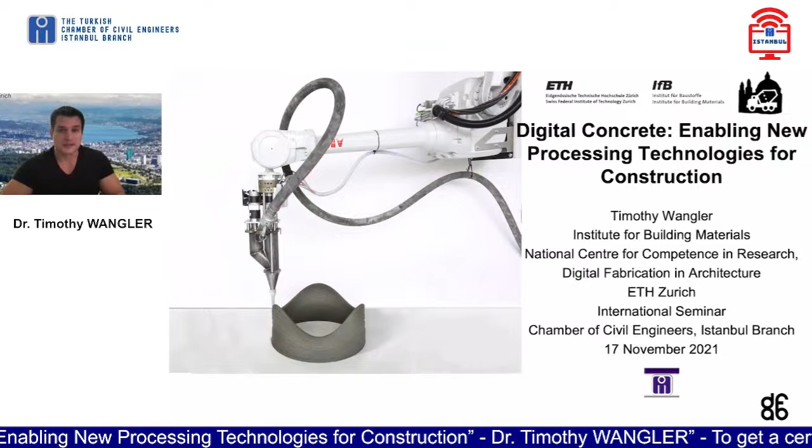Thank you very much, and thank you for the introduction. It's really an honor, and I thank you for this invitation to give this lecture and this seminar. It's really wonderful that we can do this online via Zoom, as we're all used to by now, although I much prefer to do these types of things in person. I still have fond memories of speaking in Bursa two years ago, especially of the kebab Iskander. But enough of that—now it's time to discuss digital concrete and the real topic of my seminar.

I won't go into much detail because of the nice introduction about where I'm coming from, but I'm coming from the Chair of Physical Chemistry of Building Materials at ETH Zurich. It's headed by Professor Robert Flatt, who's a world expert, of course, in chemical admixtures, especially superplasticizers. We have a rather large team, and of course, as I mentioned, a strong competence in chemical admixtures, which is in fact one of the most important aspects of research in digital fabrication with concrete.

The team, with respect, actually about half of the research group's focus is on digital fabrication with concrete, with some faces that are involved or recently involved, seen here in this slide. So it's quite a wonderful topic for us for the past few years, with a lot of things going on, especially thanks to the National Center of Competence in Research, which started in 2014. It's a 12-year funded program that we are one of the participants of.

It's the largest funding mechanism from the Swiss National Science Foundation. It was an initiative to foster architecture, construction and digital technologies, and to bring these together with many different researchers, all brought together in an interdisciplinary center.

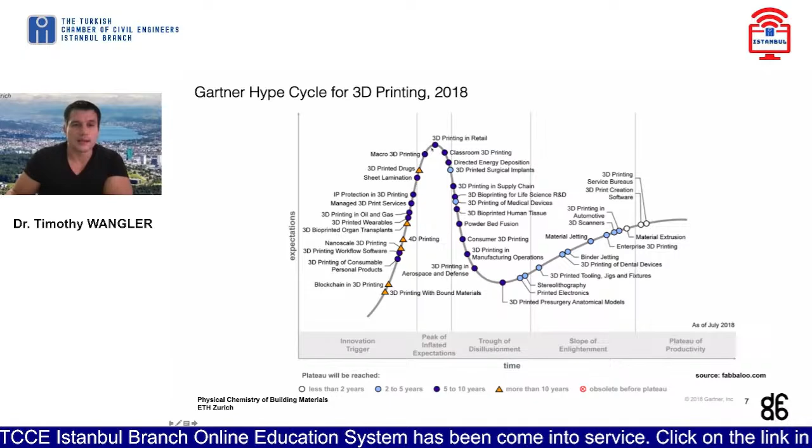So I often like to include this slide, which is something called the Gartner hype cycle. The Gartner hype cycle is a kind of descriptive curve of how technology evolves. A new technology first has some trigger, it explodes onto the scene, and everyone believes it will save the world. Everyone believes this is the newest and greatest technology before it reaches this peak of expectations, which are just too high, and everyone realizes that this new technology won't save the world, and it comes crashing back to Earth in this so-called trough of disillusionment before entering what's called the slope of enlightenment.

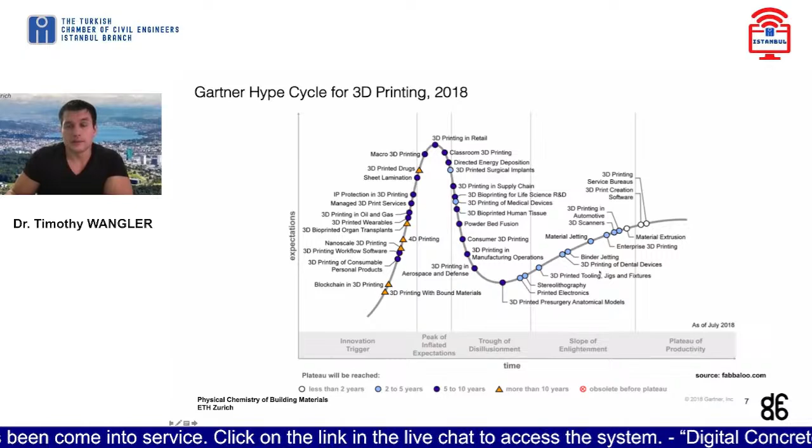This hype cycle has been generated for many different types of technologies, including 3D printing. I believe that our little section of 3D printing with concrete can be included here as well, in the top here in macro 3D printing. But keep in mind, this is from 2018. I believe we're starting to fall down somewhere in this region by now, because while there's a lot of hype for it, there's currently a lack of very big market penetration. This will probably take some time before it gets to that point.

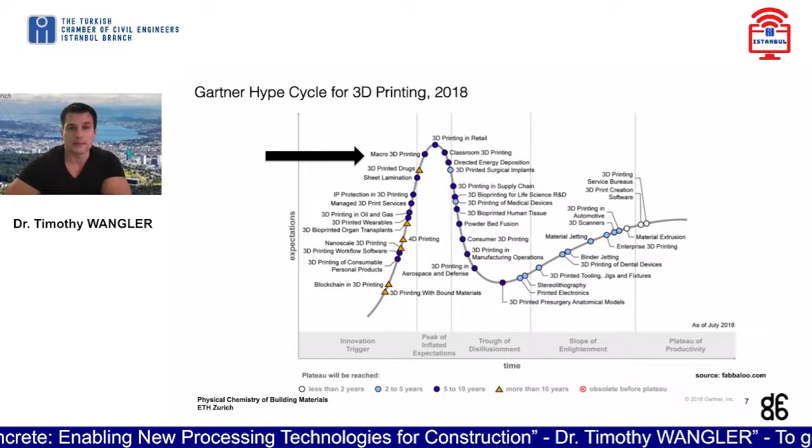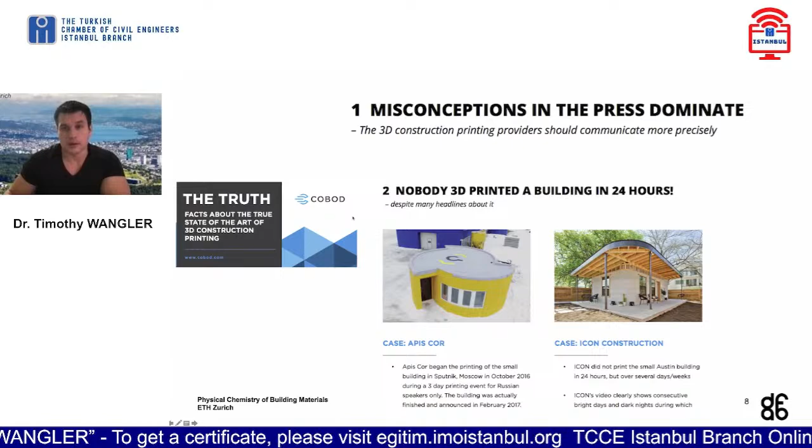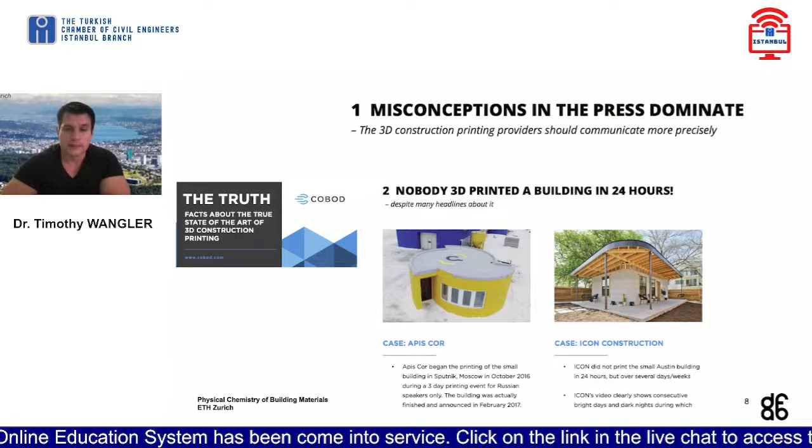Not to mention that a building is a lot more than just the concrete vertical walls. Many different aspects go into a building besides just the walls. But even the walls have not been 3D printed in 24 hours. So many challenges still remain, which we'll discuss.

So why all this hype? It's worth asking, what problem are we trying to solve with this technology? What is it really good for? What we at ETH Zurich believe is that its main promise is in increasing sustainability, while many are attracted to its increase in productivity. So we think it has the chance to reduce the environmental footprint of concrete, and there's also the idea that it can increase the speed of construction.

So let's focus on the sustainability case. Well, what does 3D printing bring you? It brings you shape freedom.

Essentially, it gives you what you could say is complexity at a lower cost. So you can produce bespoke or unique elements without paying for very expensive processes to create them.

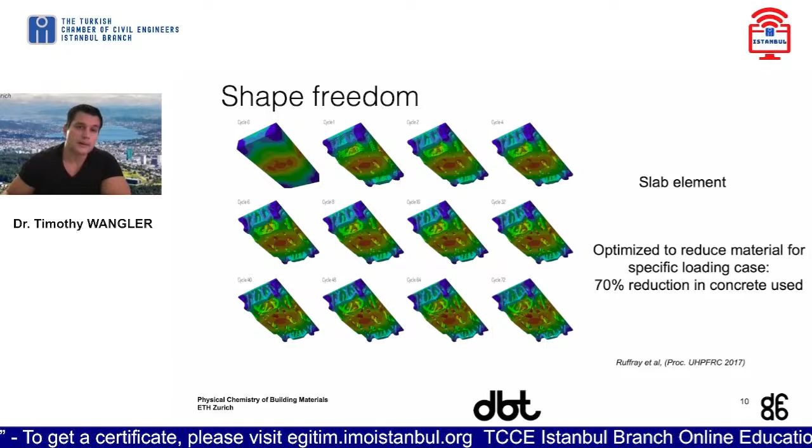To give an example, this is a slab element using a topological optimization algorithm for a specific loading case. Material was removed so it could still support the load with up to 70% reduction in concrete, the idea being that you're putting material only where it's needed. And if you're putting material only where it's needed to create this complex shape, how are you going to create it?

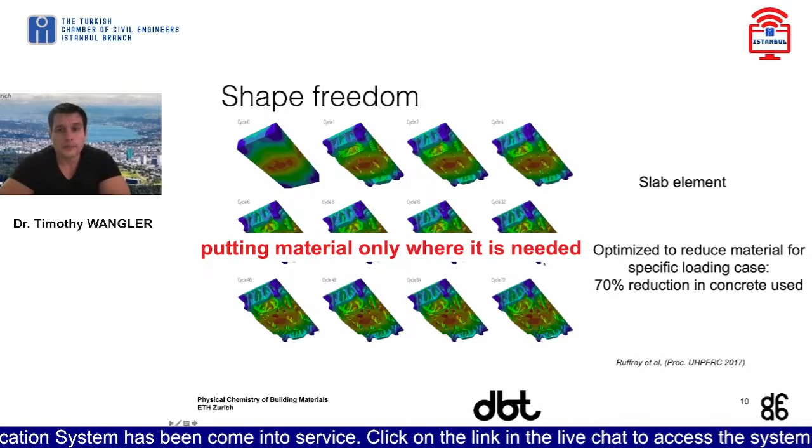It turns out that to create this complex shape, you need a method which can create these complex shapes at a lower cost, because until now, architecture really is limited more by the economics of construction rather than by physics. It's limited because of the construction of formwork, and formwork forms up to 50 or more than half of the cost of many standard constructions.

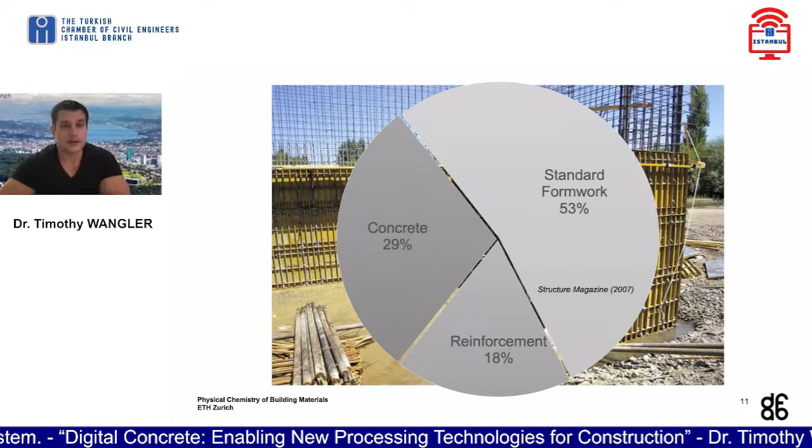This forms really the big share of the costs in construction with concrete, formwork labor especially.

So the moment you become non-standard, your costs increase dramatically.

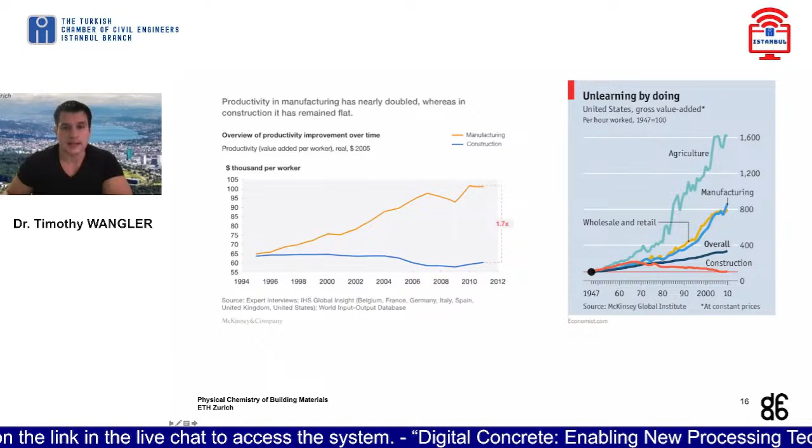So why is there this huge gap between the other sectors? As you can see in this plot, agriculture has really exploded in productivity compared to construction, which is just lagging overall. And here we see manufacturing again.

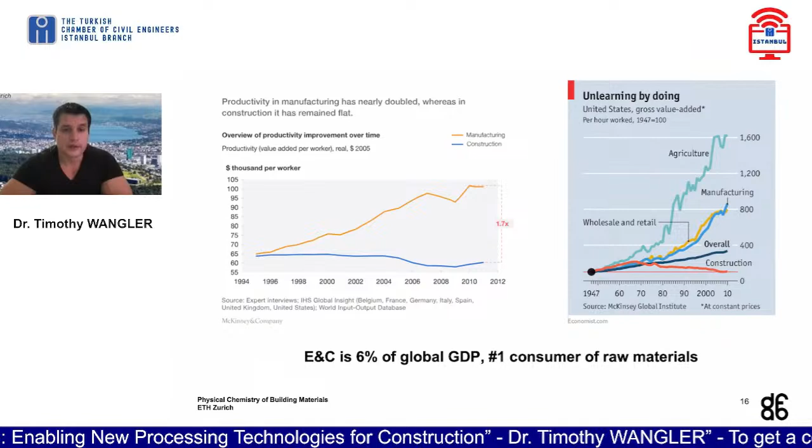This is a very big issue because engineering and construction, or the architecture, engineering and construction sector, is 6% of global GDP, and it is the number one consumer of all raw materials in the world. So greater productivity would be a wonderful thing for the construction sector to realize.

The major cities of the world are all suffering from a labor skills shortage. Many of these construction jobs are considered undesirable in these areas, too dangerous, and as a result it's very difficult to find workers, even for many standard jobs, as maybe you've seen in the news in the United States. It's very difficult to staff.

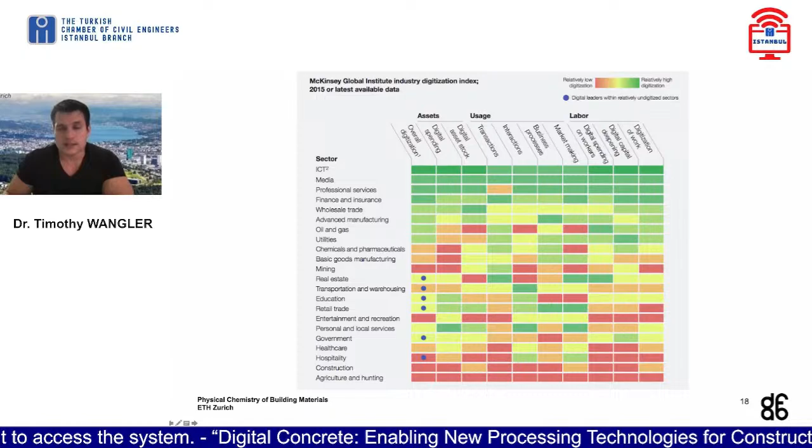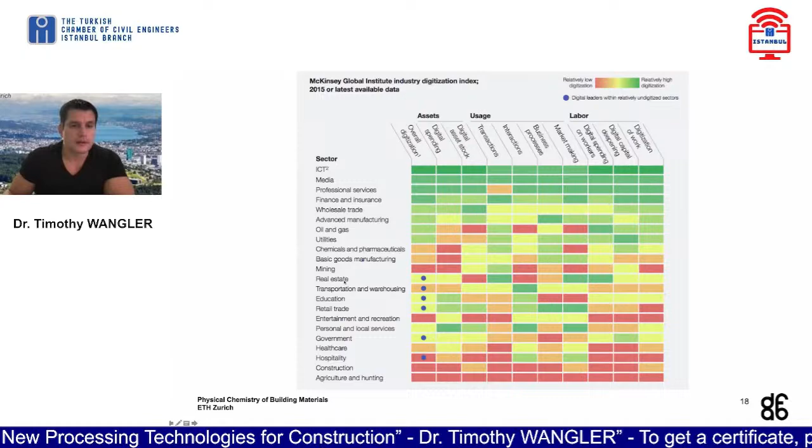Another major problem affecting the construction sector, which is probably related to its very low amount of productivity, has to do with its level of digitalization. This is from the McKinsey Global Institute, where they created a digitization index showing the level of digitization in different sectors of the economy. As you can imagine, things like media are very well digitized, and even manufacturing quite well digitized. But down here at the bottom is construction, just above agriculture and hunting. So construction really suffers from a digitization gap, you could say.

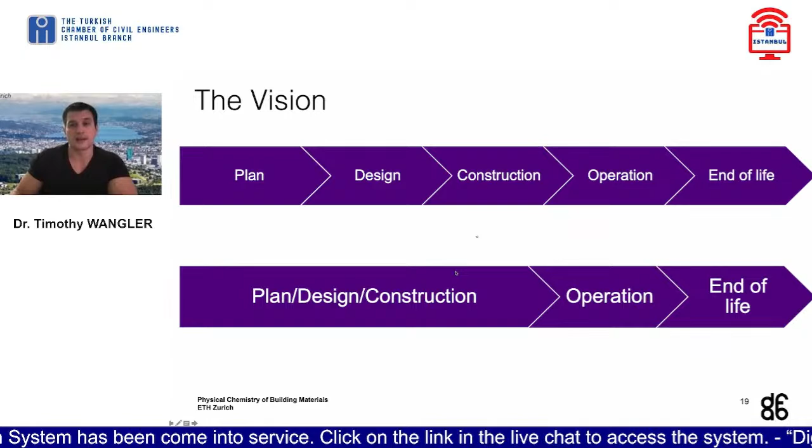So the vision to address all this has to do with the chain of events that occur in a construction's lifetime. First comes the planning, then the design, then the construction of whatever your building is, then the building or structure has to be in operation until it reaches its end of life. The idea behind the use of digital fabrication technologies is to merge these first three steps—planning, design, and construction—to make this much more efficient. Once these are much more efficient, this will help reduce costs and increase productivity.

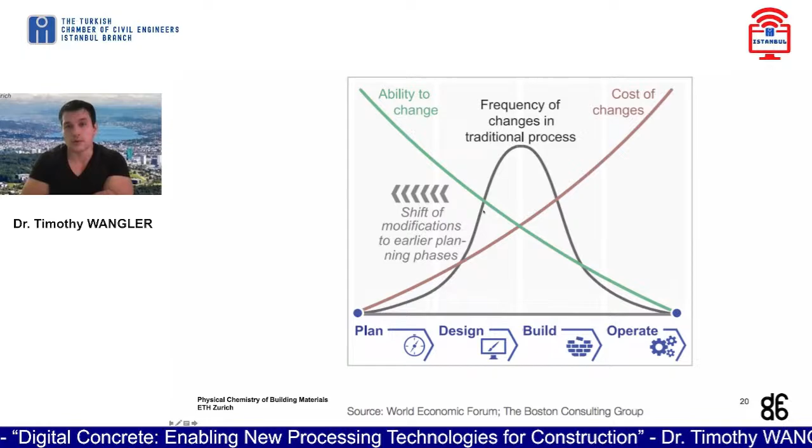The more you shift your modifications to the planning and design stage, when things are just virtual, either on paper or in digital form, then your costs decrease significantly.

One of the questions I want to answer at the end is whether these two reasons for doing this technology are compatible. We'll come back to that at the end of the seminar.

Now I want to discuss the methods that we've developed at ETH Zurich. We've developed quite a lot of methods, but many others have developed them as well.

At ETH Zurich, I mentioned earlier the demonstration called the DFAB house. This house is located in Dübendorf at the EMPA campus, at a building called Nest, a series of slabs where you can test different construction technologies in a modular fashion. We tested the construction of this DFAB house, which contains different elements, or innovation items, related to digital fabrication technology.

What you saw on top were robotically fabricated timber units with a translucent facade containing special aerogel insulation, and then a so-called smart slab made from 3D printed formworks. The facade, a clear facade supported by different mullions or columns, was produced by our Smart Dynamic Casting technology.

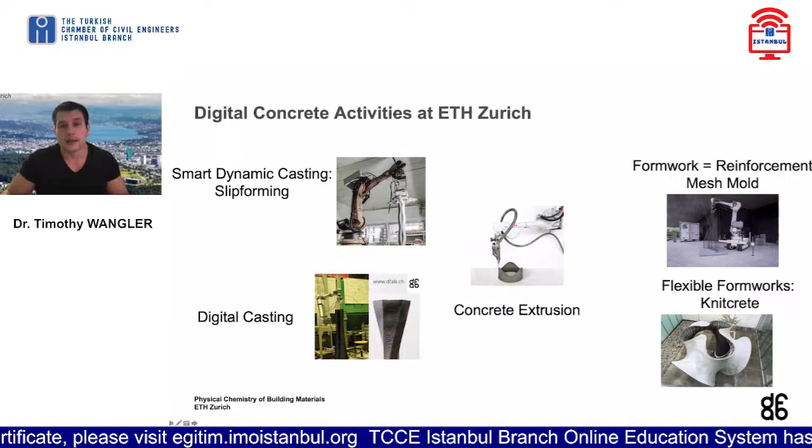So these are the different technologies developed at ETH Zurich. I mentioned Smart Dynamic Casting, which is a slip forming technology. We have digital casting, concrete extrusion or 3D printing, which everyone is familiar with. And then mesh mold and knitcrete, which I'll discuss as well.

First, I'd like to talk about the mesh mold technology. The idea is to robotically produce a mesh which acts both as formwork and reinforcement. It's essentially the construction of a functional formwork, a very promising type of technology.

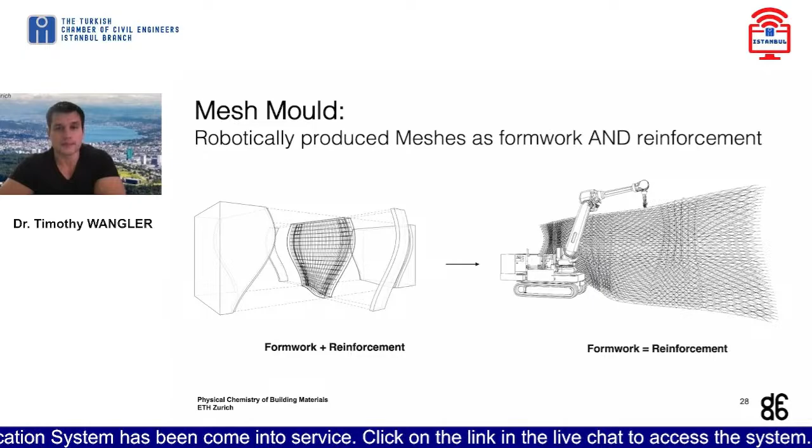For the mesh mold wall, we use a so-called in situ fabricator. This is a mobile robot that can position itself through positioning sensors, positioning the tool head of the robotic arm mounted on it. This tool head can bend, cut, and weld steel together, essentially stitching together steel reinforcement bars in a specific shape.

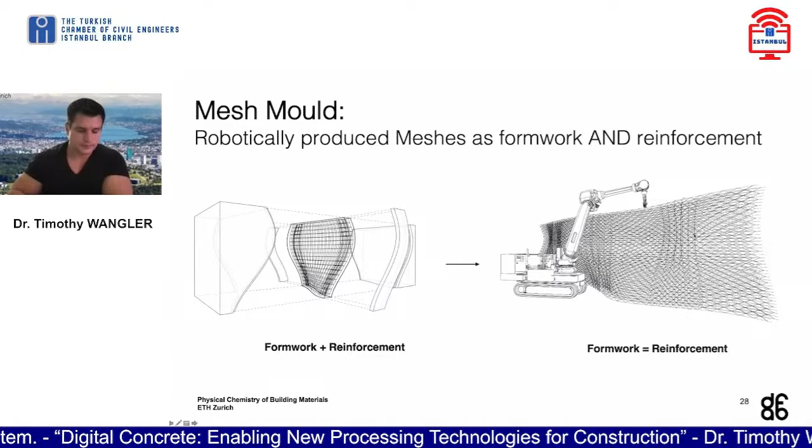These steel reinforcement bars are stitched together to form this wall, and then the tricky part, at least where we come in, is the construction of the steel cage. It's also tricky to put the concrete in, and that's what we did - essentially pumping in from the side a pumpable, fine-grained mortar, which was easier to put inside before it was then finished.

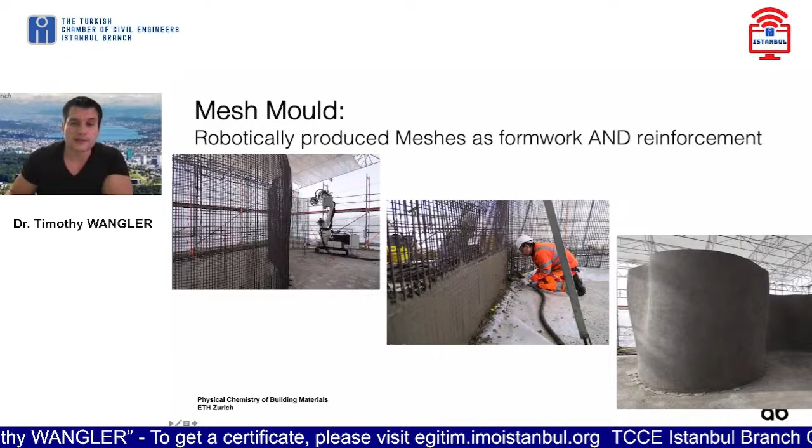The idea behind slip forming is you take a formwork much smaller than the element being produced, and put very fluid concrete into the top of the formwork. As it moves up over time, rotating, forming deformations and changing shape, it hardens the moment it comes out of the bottom of the formwork.

This obviously relies on hydration control, or control of the hardening process, which was really the key element for this technology. It's also the key element of every technology related to digital concrete, which I'll discuss.

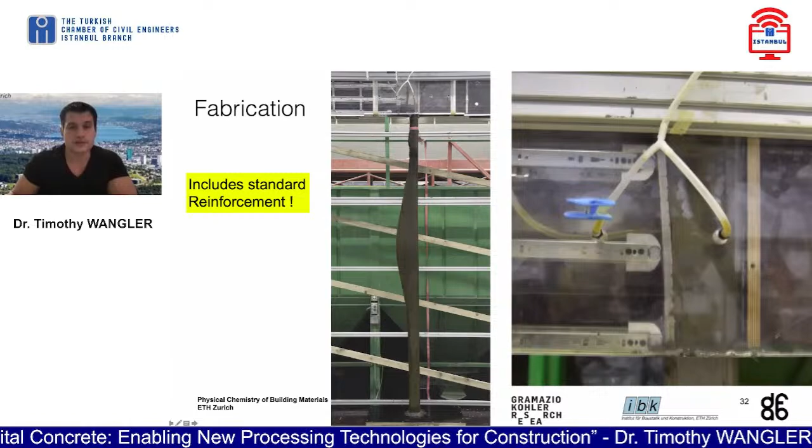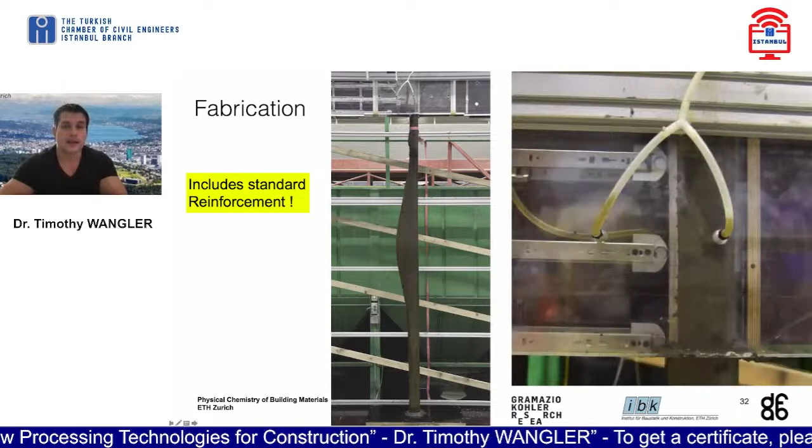One of the best things about this process is the ability to integrate standard reinforcement. What you see in this video is the production of one of these facade mullions, the columns used to support the facade elements. As the formwork slips up, it can change its shape to put the material in the center, because the main loads these columns bear are wind loads, and the major compressive loads will be in the center of the column, so that's where you need most of the material.

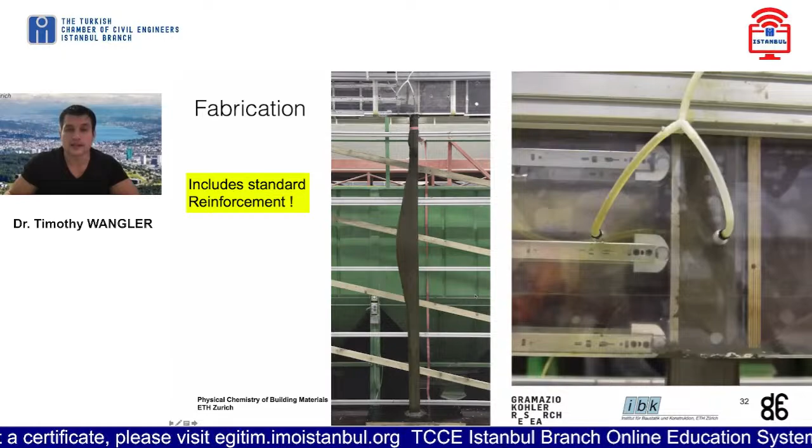As I mentioned, one of the major reasons we like this technology is because it integrates standard reinforcement. With 3D printing of concrete, it's very difficult to integrate reinforcement in any meaningful way.

Coming from smart dynamic casting is what we call digital casting technologies. In this technology, we basically use the key technological advancement of smart dynamic casting, which is control of the hydration, to control the formation or filling of weak formworks, really 3D printed formwork. So I'll play a video here for you.

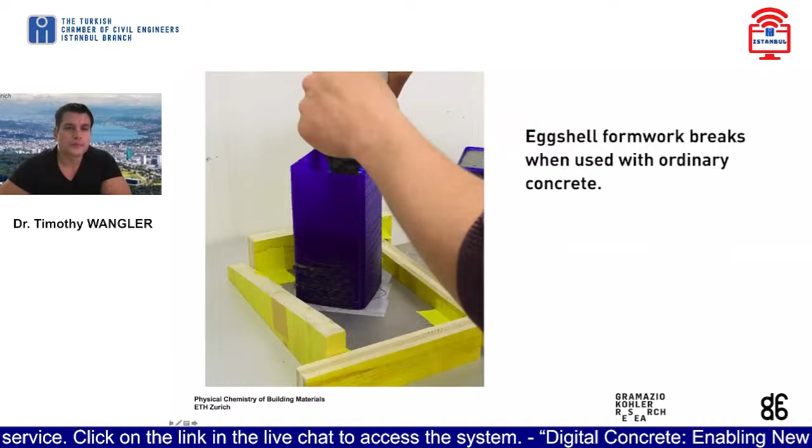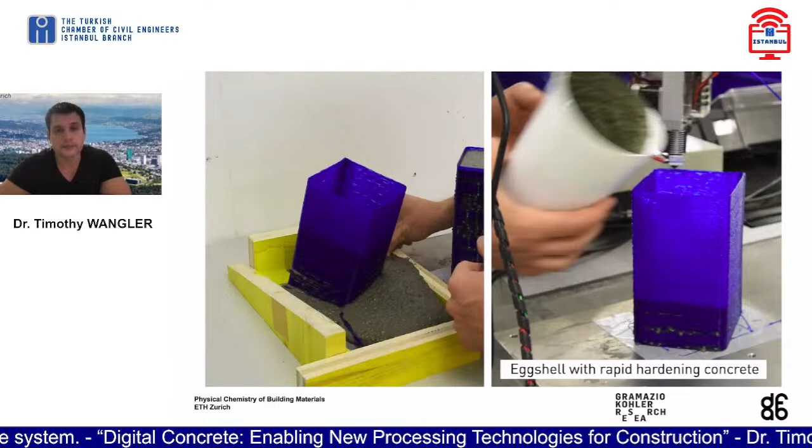Because of the formwork pressure, the formwork breaks, since these are 3D printed plastic formworks. But with the eggshell technology, or hydration control technology, you can fill these types of formworks without breaking the formwork.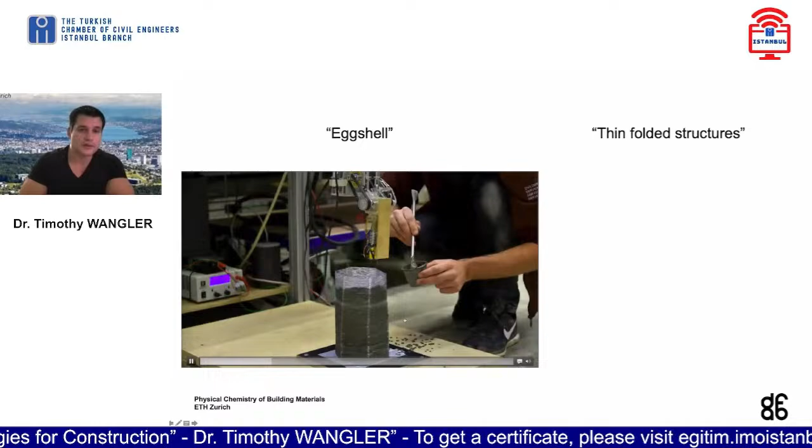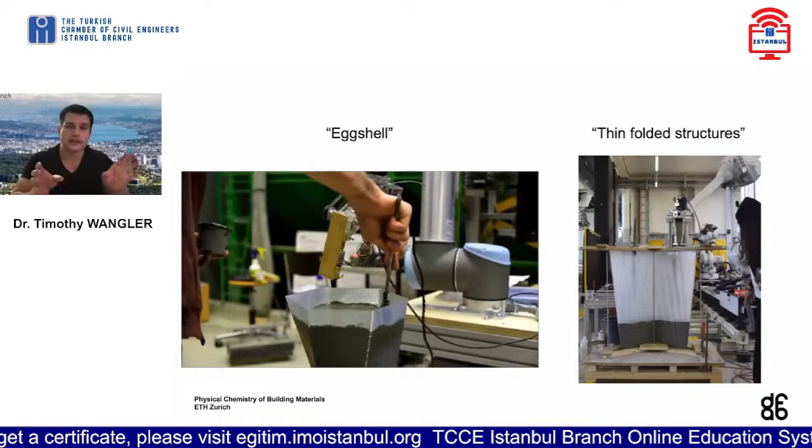This includes the eggshell process, but we can also use it to fill any kind of formwork you can dream of and just construct. In this case, to make a folded structure, the student here, Ana Szabo, took two plastic foils to create the shape she wanted, then filled the formwork using the set-on-demand or hydration control technology to control it so that it didn't receive too many deformations. That's really one of the key, promising technologies we see, this hydration control technology to fill non-standard formworks.

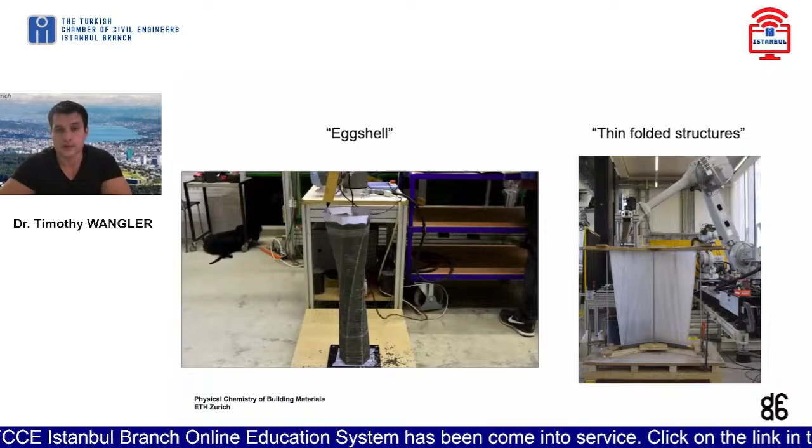In fact, most recently, it's been used to fill formworks made from paper.

Last but not least is concrete extrusion, or 3D printing with concrete. This is, of course, the technology most everybody is familiar with until now, because it's the technology that makes up 90 to 95% of the research, and also probably has the most market promise, at least until now.

Under the context of a project called Concrete Choreography, I can describe our system. We 3D printed, for an art foundation in Graubünden in Switzerland, for an art festival, 9 columns for a dancing stage.

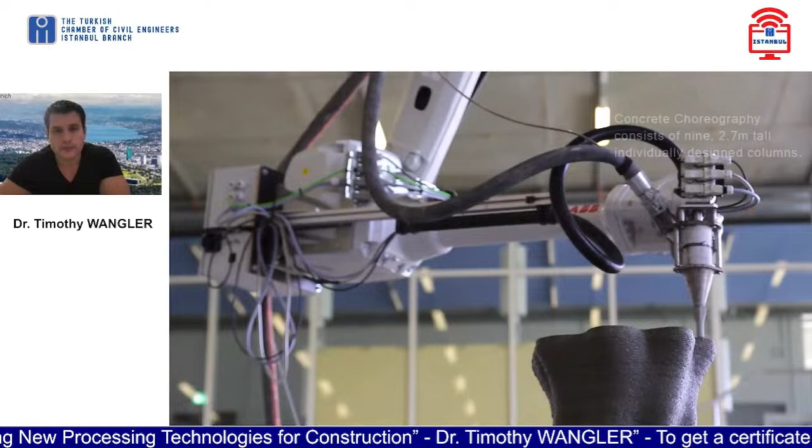These were digitally designed columns. The students first had to take the digital designs, or create them, and then turn these digital designs into something the printer could create. Then they were printed. The printing is done at a vertical print rate of about at least 1 meter per hour.

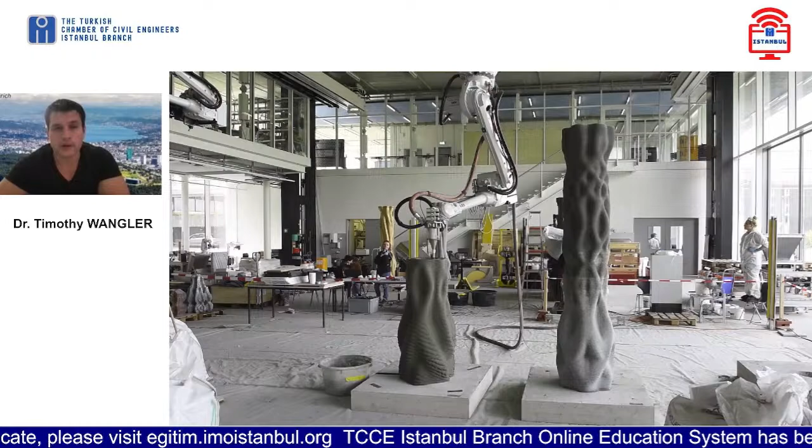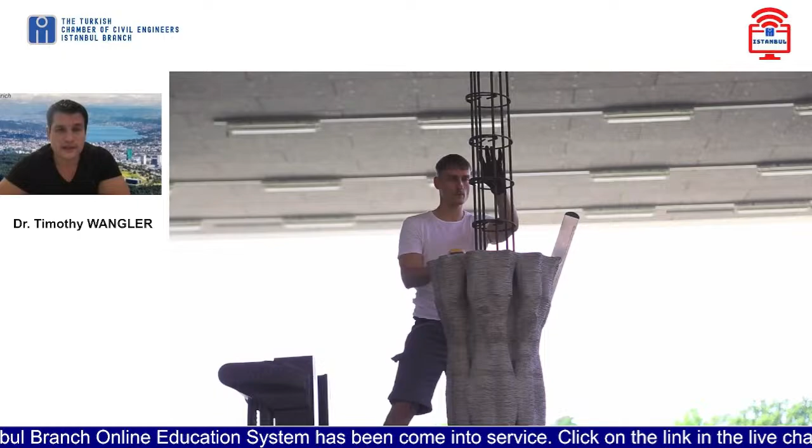It's done through a set-on-demand technology, which I'll describe, again all related to hydration control. Now, as you saw, there's no reinforcement until now, because the print head doesn't really allow easy integration of reinforcement, so the reinforcement had to be added.

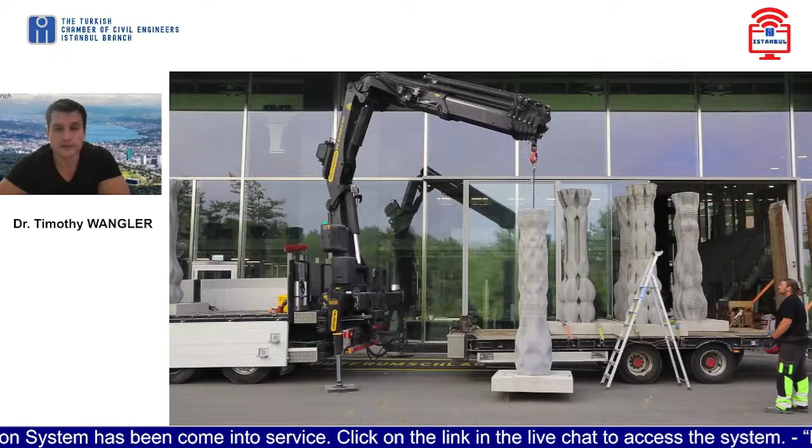Basically, the 3D print is a lost formwork. You install the steel reinforcement and then cast structural concrete inside. This is how this technology is being used in almost all market cases today, simply as a lost formwork.

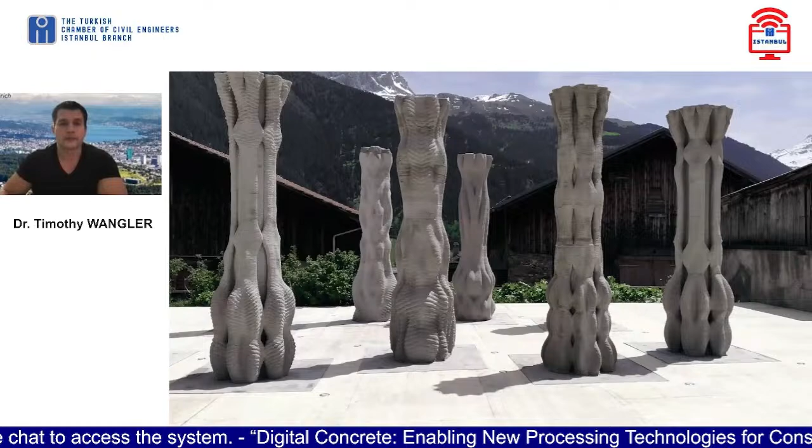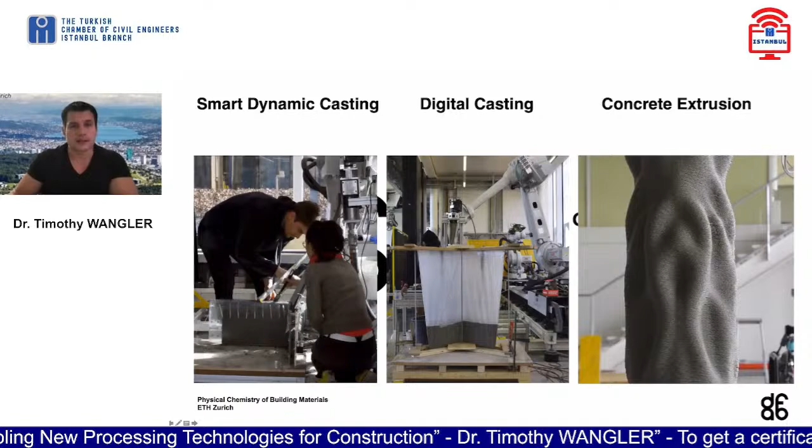After talking about the technologies, what I'd like to point out is what is unique, or common, about all three technologies, the main ones related to concrete processing: smart dynamic casting, digital casting, and concrete extrusion. It all has to do primarily with the fact that they are dealing with continuous concrete processing.

In these processes, I would say in most digital fabrication processes with concrete, you have some universalities. That includes, first, that the concrete has to be delivered, it has to get to the point where it has to be placed, so it has to generally be done by pumping, meaning it has to be pumpable.

Then it has to be placed and hold its shape. I just call this placeability, because sometimes the concrete has to flow well to fill a mold, or sometimes in extrusion it has to be stiff enough to hold its shape so the next layer can come on top of it, and that is a very unique step. The concrete then has to have strength to support further layers placed on top of it, which in the field is called buildability.

So schematically, they're seen here. On the left is the process for smart dynamic casting and digital casting, where you just need to fill a mold.

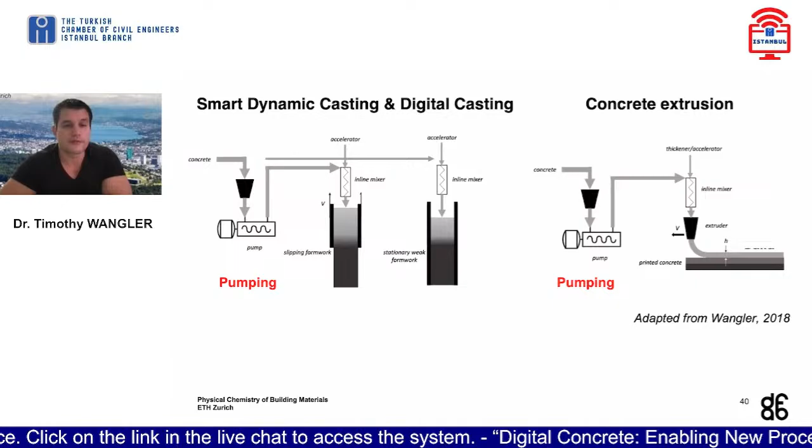And on the right is concrete extrusion, or 3D printing. First there is a pumping step, then a placement step, then the building step, where for 3D printing each layer has to harden a bit more to build strength so that the next layer comes on top of it without collapsing it, and so on. The same is true for smart dynamic casting and digital casting.

You can put the concrete in, and then it has to harden, because as the formwork slips up, it just collapses if it doesn't come out. And in the case of digital casting, the formwork will break.

What we state is that if you want to achieve structural scale heights in very fast processing times - let's say you want to 3D print a building in 24 hours - you have to have absolutely some form of hydration control.

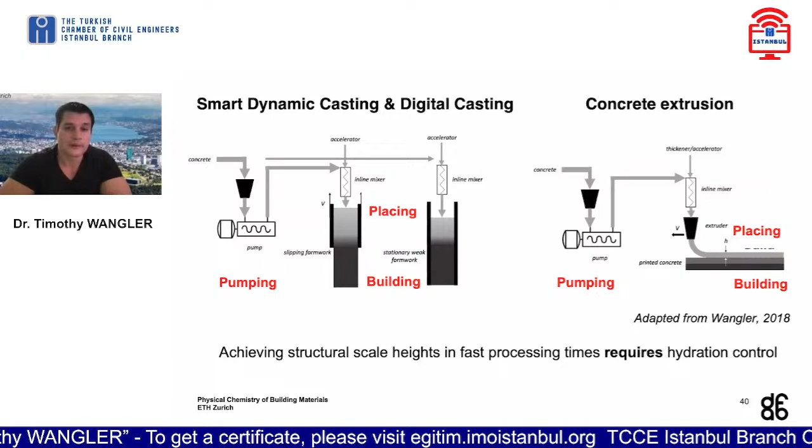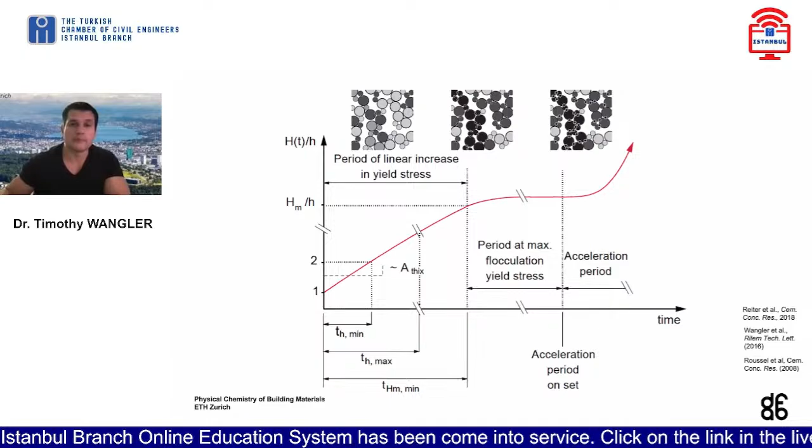And the reason for it is this. This graph gives you a concept of how strength builds up over time in a fresh cementitious material. First there is some green strength, so it's fluid, and there is what is called normally in the field thixotropy, or thixotropic buildup. Sometimes it's called a kind of green strength, and this comes predominantly from flocculation processes between cement particles and some low-level hydration products being formed, but massive hydration hasn't started yet.

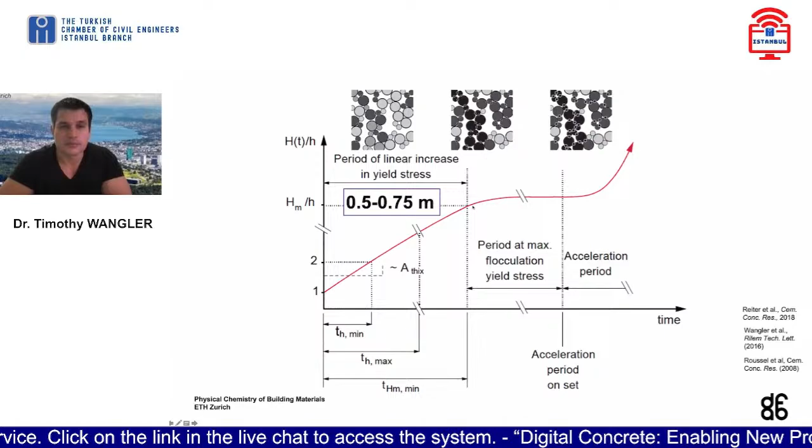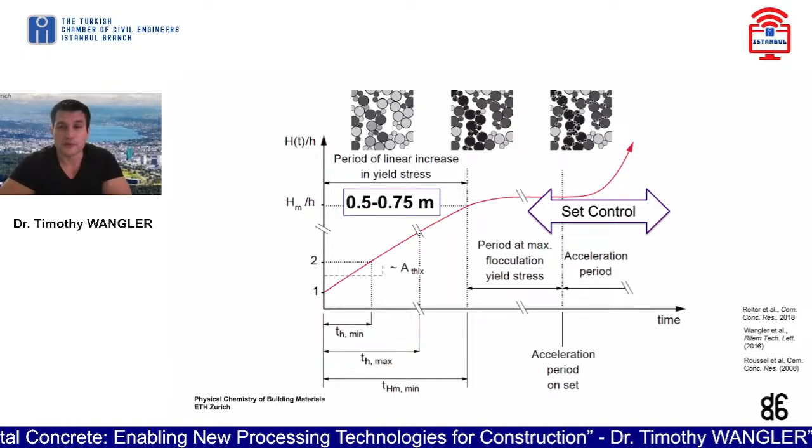You get a collapse. So what that means is that you have to initiate hydration, and to initiate hydration is some form of set control and the formation of massive hydration products, which then give you the strength buildup that you need. This is done through the addition of an accelerator, typically.

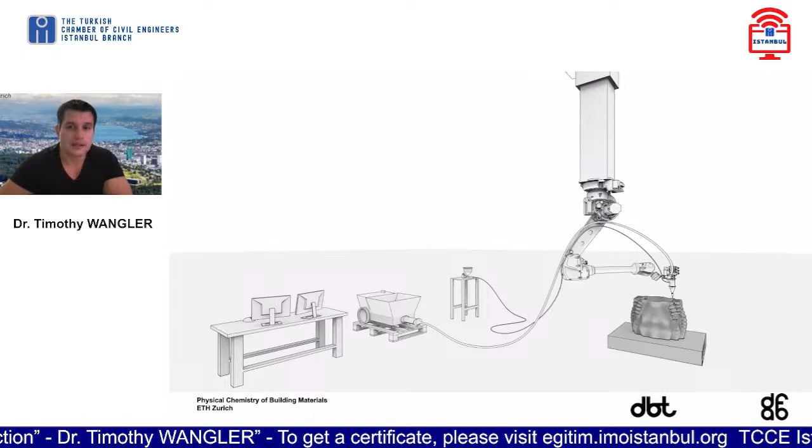Now, accelerators are typically added to concrete right when you mix it in the batch mixer, and then transported to where they need to be transported and then placed. But what we have found in our systems is that you need to add the accelerator as close to the point of placement as possible.

So this is a schematic of our 3D printing process where we have a concrete pump. We have our nozzle, so that's where the concrete comes out, and then our robotic arm. This is our 3D printer because the process is all controlled here by a computer. And then we have our accelerator pump, which is adding accelerator here, right at the point of placement, in an inline mixer.

The reason for that is because if you don't add it at the point of placement, then you get buildup normally of accelerated and hardening material in your pumping line, and then eventually your process has to stop.

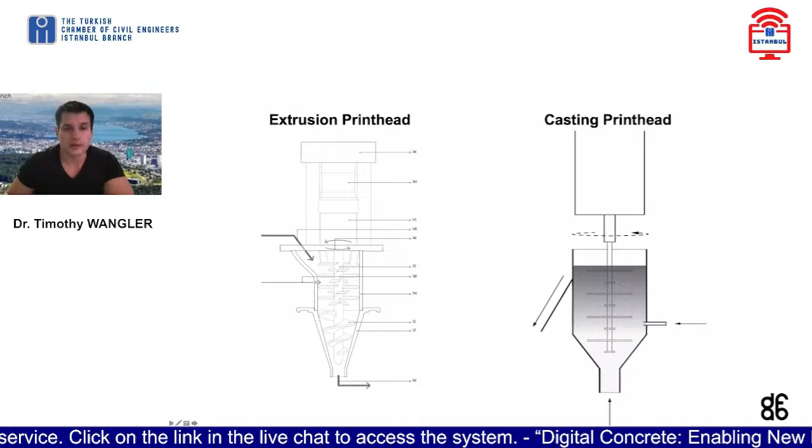We have developed a couple of printheads. On the left, you see our extrusion printhead, where we have some impellers that are mixing in the accelerator that we inject here before it comes out of the extruder. And here's our casting printhead, where we inject an accelerator before it comes out of a chute into the formwork.

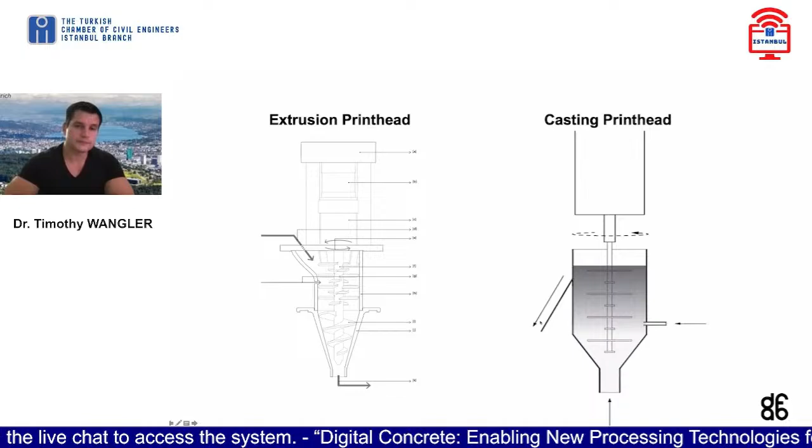So there's some kind of sleeping concrete. We generally retard our concrete to get a longer open time. We add the accelerator, have an active mixing unit with a motor, and then out comes the activated concrete.

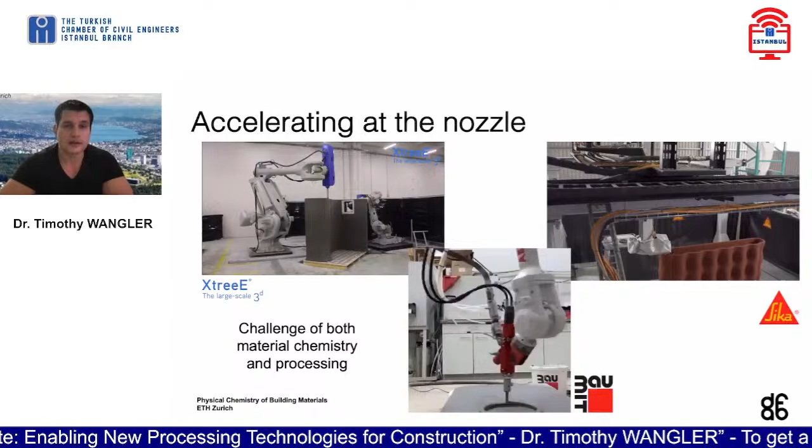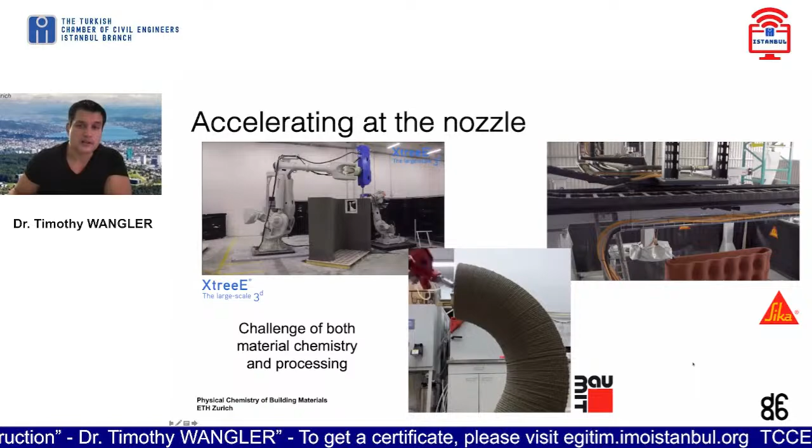And this is really the state of the art from industry as well. There are really only three industrial players when it comes to very fast vertical build rates with the addition of accelerator close to the point of placement: of course the system from the startup in France, XtreeE, the Baumit system developed in Austria, and Sika, which has made a lot of headlines with their really great 3D printing system.

But this is really what allows you to build at rates of anywhere from 1 to 5 to even 8 meters per hour vertically.

Last among the methods I'd like to talk about is knitting as a method of digital fabrication with concrete. You might think, well, that's a bit strange. What, how can you knit with concrete? Well, you don't really knit concrete.

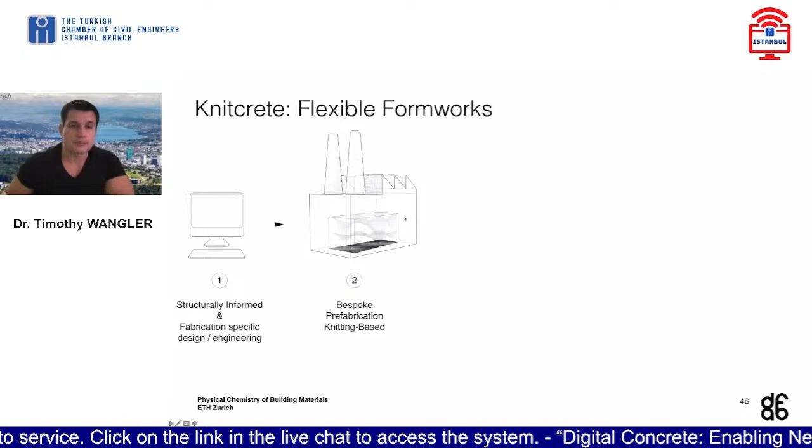The great thing about knitting is it allows you to create very nice, beautiful, bespoke shapes in space that you then concrete. So the idea behind Knitcrete, developed by the student Mariana Popescu you saw on the previous slide, has to do with first the generation of a structurally informed shape, and then there is a prefabrication of the knitting-based formwork that will then be tensioned in space.

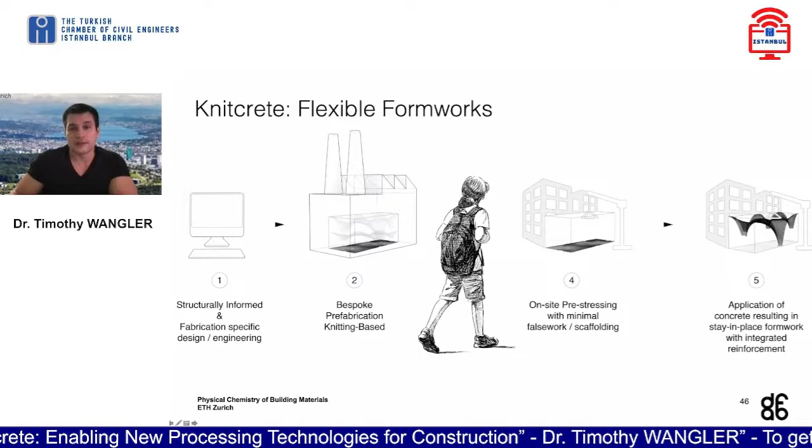You can then transport it to site in a backpack, and then it gets tensioned on site to form a specific shape in space, which then allows the application of concrete to harden and form a structure. This allows the construction of these long kind of arch-spanning structures, which are difficult to produce without a lot of scaffolding. This allows their production with minimal scaffolding.

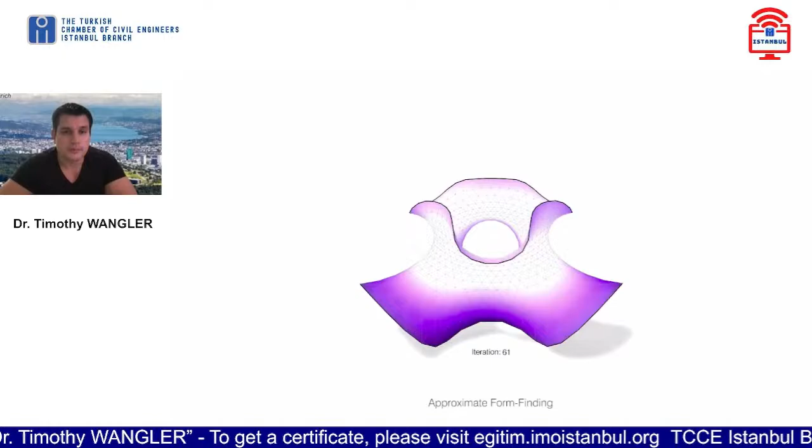In that context, with that concept, Mariana and our PhD student, now a postdoc, Lex Reiter, produced this big demonstrator. Here's the shape formation. This is a demonstration that was done in Mexico City, at an art museum there called Knit Candela. So this is the generation of the shape, and then the knit patterns.

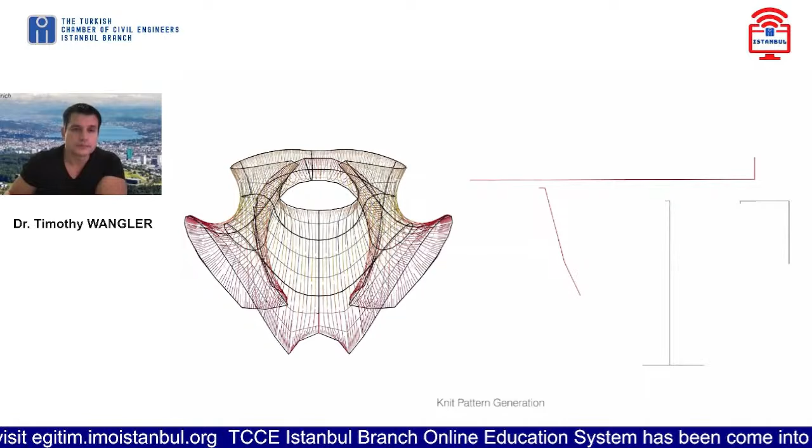And then there's still scaffolding that needs to be formed, but it's very minimal in amount, and none of the scaffolding is inside. You tension it in space and then apply the concrete. This is the digital model of what it should look like.

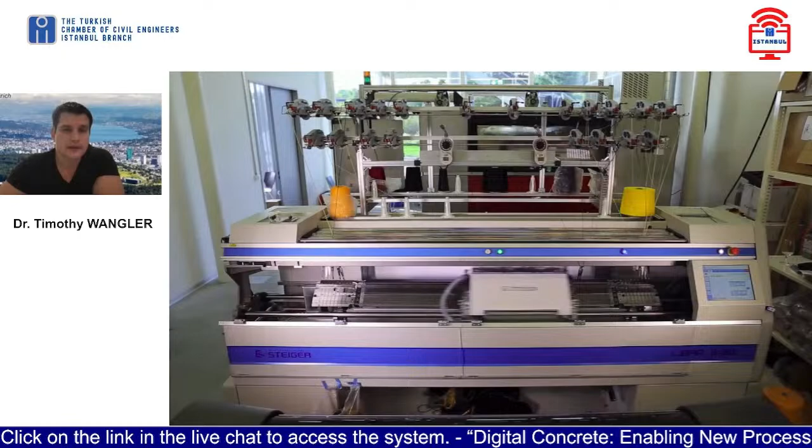So this is the actual knitting process that took place. In the space of a couple of days, Lex and Mariana knitted out the formwork in four pieces. They rolled it up, packed it into vacuum-sealed bags, put it in their luggage, and flew to Mexico City from Zurich.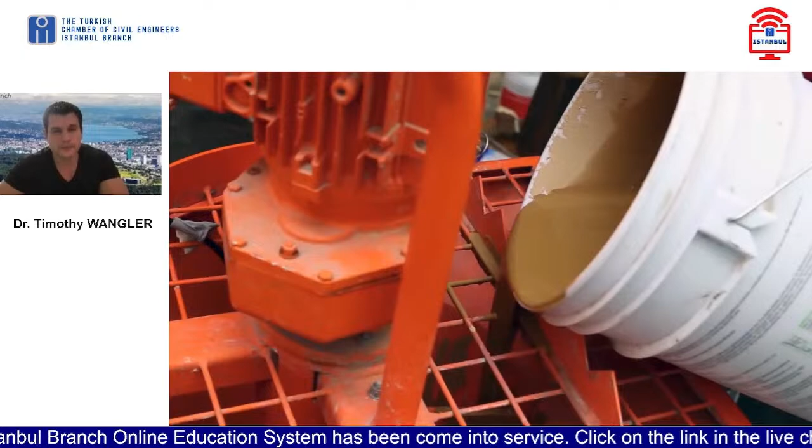Scaffolding was constructed. They added tensioning rods so that the shape could be formed. It's almost fully formed. They wanted to add a bit of porosity to the shape, so they put in these balloons. Now here comes the concreting part, which was essentially developed by Lex, a series of stiffening layers.

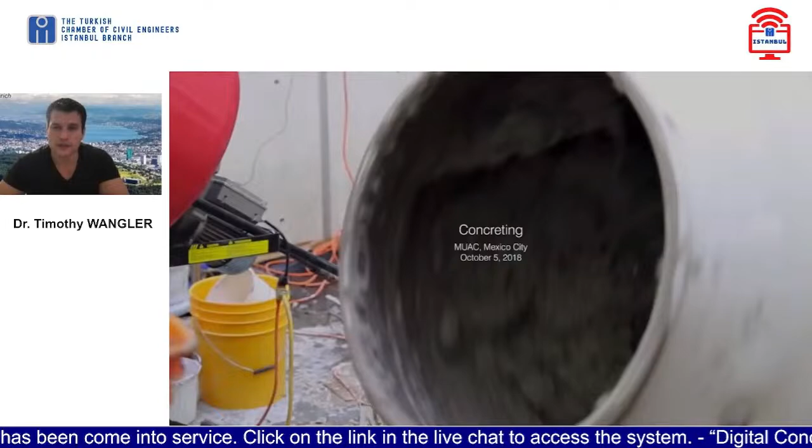The first was a very rapid stiffening cement-based layer. This gave it the ability to withstand deformations during the application of the concrete, and also gave a surface for the concrete to adhere to.

And now this is not the digital model anymore - sorry, so this is now no longer the digital model, this is the real thing. So the fidelity of the real structure to the digital model is really quite spectacular. Really great work done by Lex and Mariana.

Okay, enough of that. Now I'm close to the end of my talk, and I really wanted to discuss the issue of sustainability, because what you saw in all these demonstrators was the ability to create nice bespoke shapes. These shapes certainly will allow for the reduction of material usage through many different avenues. But it's really worth understanding if this technology is sustainable, or if it's sustainable yet.

And I think that means we have to understand what sustainability means in terms of environmental impact. What we like to say is that environmental impact is a ratio or quotient between the amount of embodied CO2 per unit mass of concrete times the total amount of concrete that you use for a given structure.

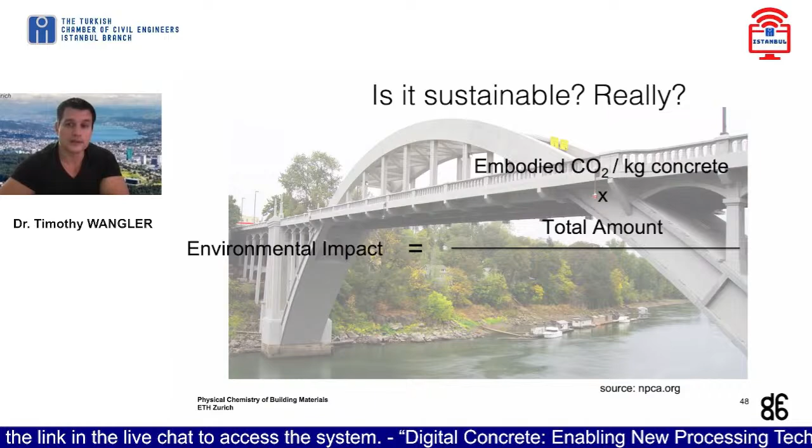So let's imagine this bridge as a structure. If we use a total amount of concrete that's low, then we have a lower environmental impact. And if we use low amounts of embodied CO2 in our concrete, then we also have a lower environmental impact. Our environmental impact is then also inversely proportional to the service life. So if our service life is very long, our structure stands longer, is in use longer, and we don't have to deconstruct it and renew it, renovate it, or replace it after a long time.

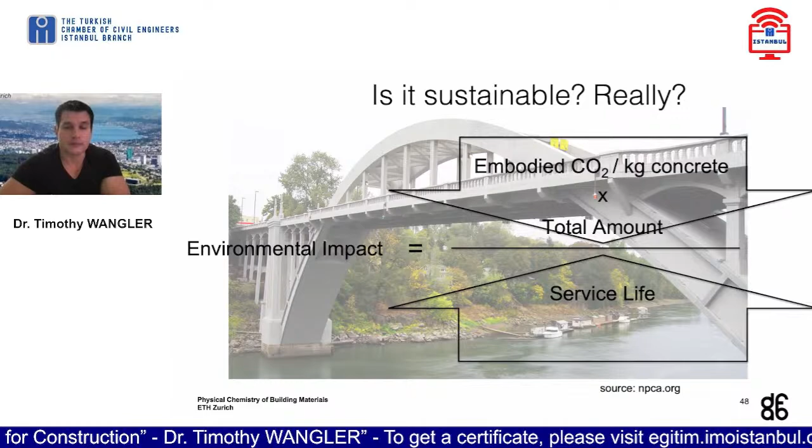So when it comes to digital fabrication with concrete, of course we want to decrease the top and increase the bottom as much as we can to lower overall environmental impact. It turns out that we're using very high paste contents in our mixes and very high clinker contents overall. We have cement contents often in the range of 500 to 600, and even one of our first mixes had 800 kilograms of cement per cubic meter - very, very high. It's like this because of the processing. So I don't think it's very sustainable with respect to this just yet.

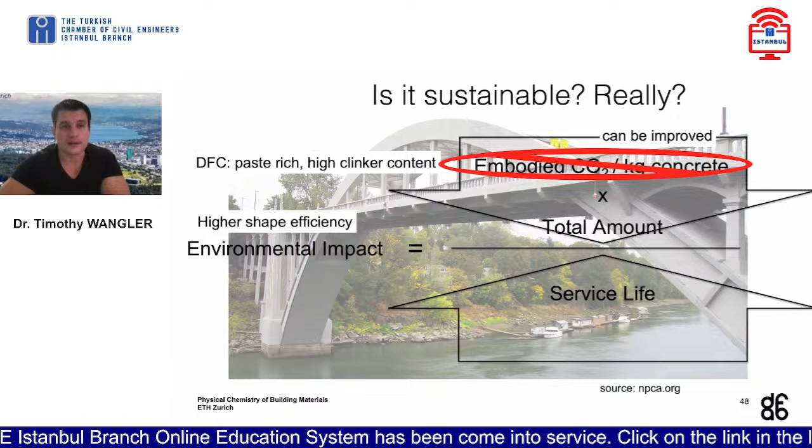When it comes to the total amount, however, there's a lot of promise here. That's because we have higher shape efficiency. We can create shapes which are not these boxy shapes that you're used to seeing. We can create curvature, and curvature generally will allow better structural efficiency, which means for lowering the total amount of material we use, I think there is a lot of promise.

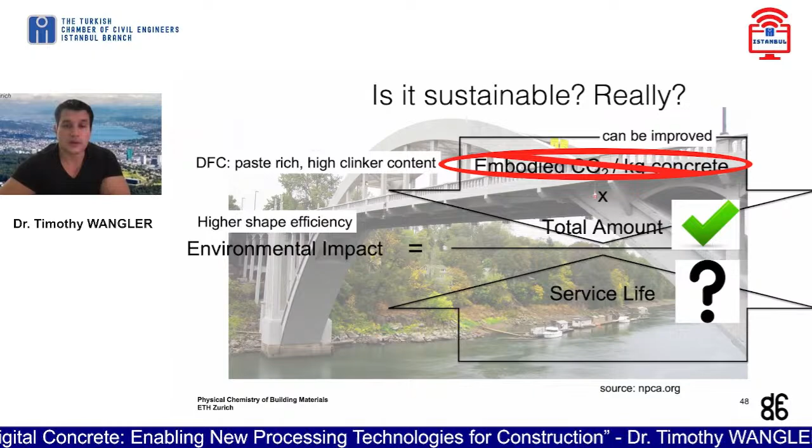But we still have the question of service life. That's something that still needs a lot of research. The research has already started, and with all these layer interfaces, you could call them cold joints sometimes in 3D printed concretes. They can become cold joints when you wait too long between layers, and then we can have potentially serious problems with respect to durability. So this is still an open question and it's still being evaluated.

It's also worth pointing out that we want this to be a technology used to lower the overall amount of material. As it turns out, the main motivation for putting in this technology, at least as seen by the companies doing it, is to replace concrete masonry and to replace masonry labor and formwork labor primarily. So it's productivity that's driving it.

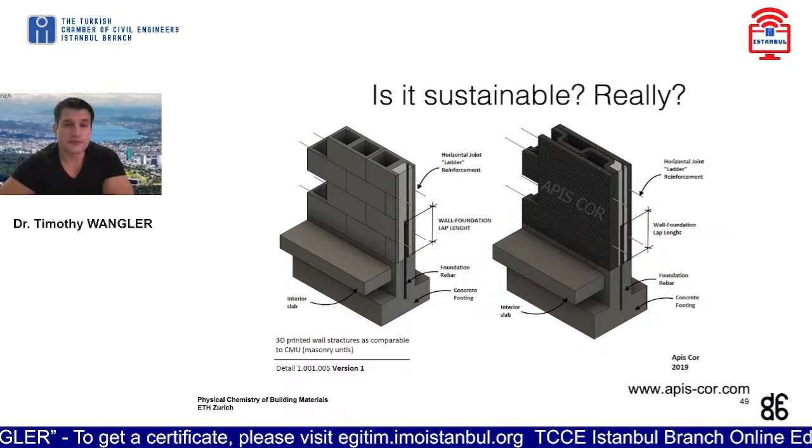This is coming from the website of Apis Cor, one of the more major 3D printing players right now. They essentially propose to replace concrete masonry with 3D printed concrete. And 3D printed concrete, as we saw, is on a per unit basis much worse than standard concretes in terms of the kilograms of cement being used. So it seems that sustainability and productivity are incompatible at the moment with this.

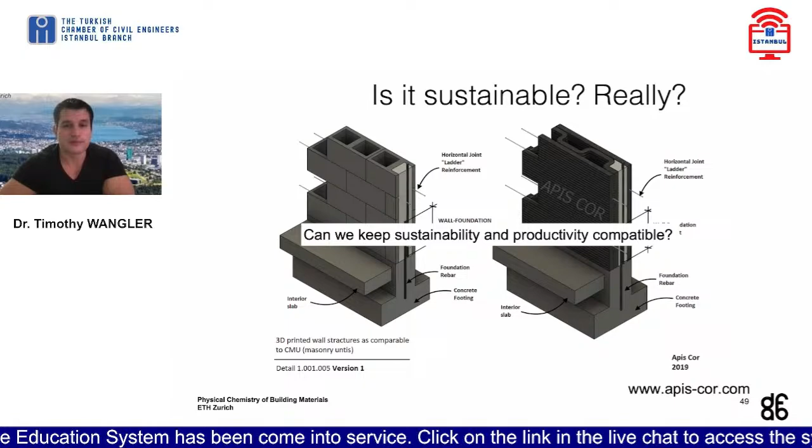But I believe there are many chances for these to merge and to complement each other, and I think it's up to us in the research community to make sure that happens.

So, main challenges. We saw a lot of different methods, and I mentioned many of the challenges while describing them, so I'll just summarize here. In cementitious material research, there's been a lot of research, most of the explosion of publications in the past 5 years, I would say.

There are still cool and interesting questions with respect to hydration and its relationship to yield stress, and I believe there are still a lot of questions to be answered in how the processing is impacting the properties. We cannot consider 3D printed materials as normal concretes. We have to realize it's a different material, and really treat and accept it as a construction material that is fundamentally different.

One thing I didn't mention, which is worth mentioning, is that if you remove the formwork from the construction of concrete, one of the functions of formwork was to serve as a skin for curing. When you remove it, you suddenly have issues related to shrinkage and drying shrinkage, so curing becomes another issue that needs to be addressed. It's a topic underway in many research institutions, how to manage the lack of a formwork.

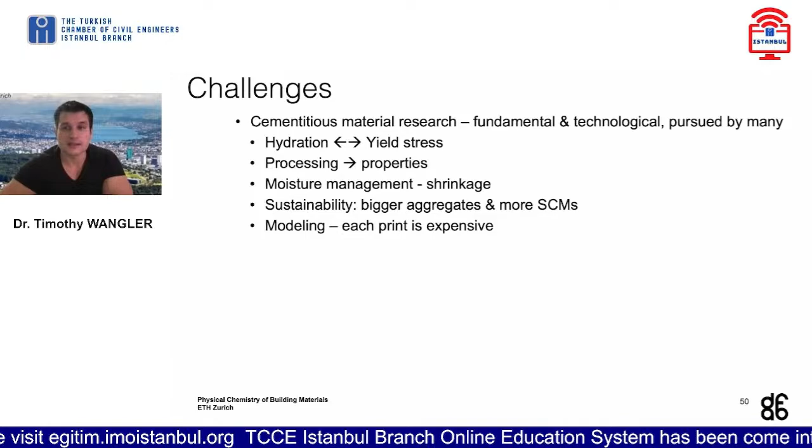And I mentioned, of course, on the horizon and actually underway now is durability—people are researching durability.

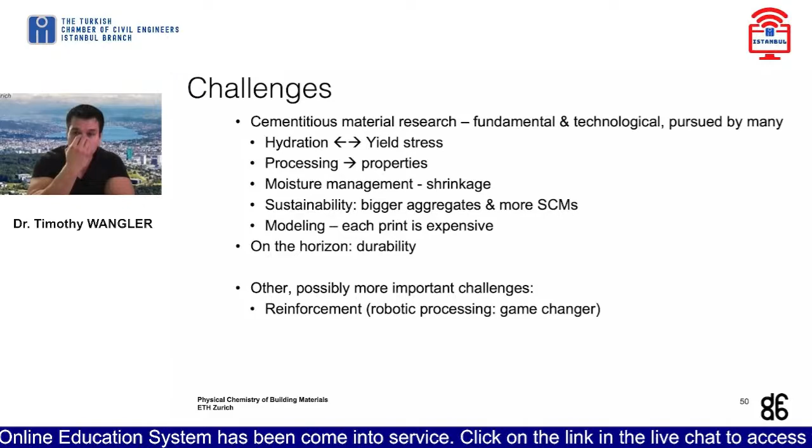Probably the biggest challenge, and I didn't talk about it a lot, is the challenge of reinforcement and integration of reinforcement. The robotic processing of reinforcement has been termed to me by an industry person as a real game changer. They said, Tim, we can control concrete hydration fine, we can 3D print fine, but it's the reinforcement that's really the issue. And many people are saying this. So adapting processes to include reinforcement is a major problem.

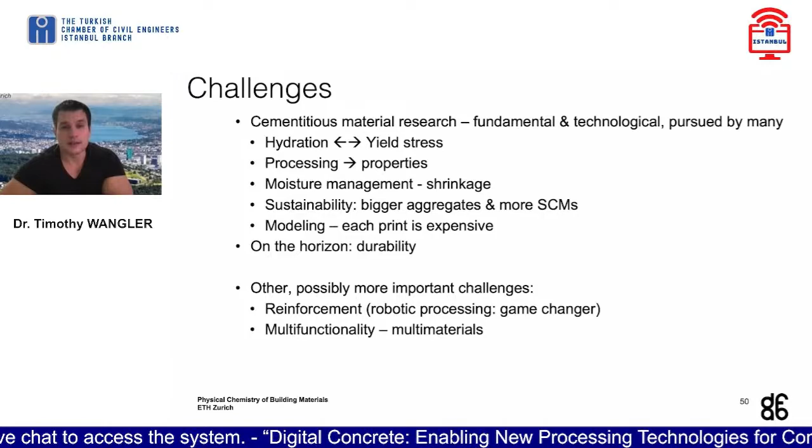There's a lot of promise with multifunctionality and multi-material printing. So let's say you could print an insulation as well as a concrete structural part. This is called by the guys in Eindhoven the concrete color printer, and I think this is a really cool concept.

And then there's the link to manufacturing, where we have to really make sure that we're printing what we believe we are printing. And then finally, I would like to say that it's important to keep sustainability and productivity compatible, as I said a couple of slides ago.

Well, I thank you for your patience. I'd like to acknowledge all the people who have worked on this topic over the years. Of course, Professor Flatt, who is one of the major players and is now actually one of the deputy directors of the NCCR, and he's responsible for a lot of this great work that you've seen.

So thank you for your attention, and I'm happy to take your questions.